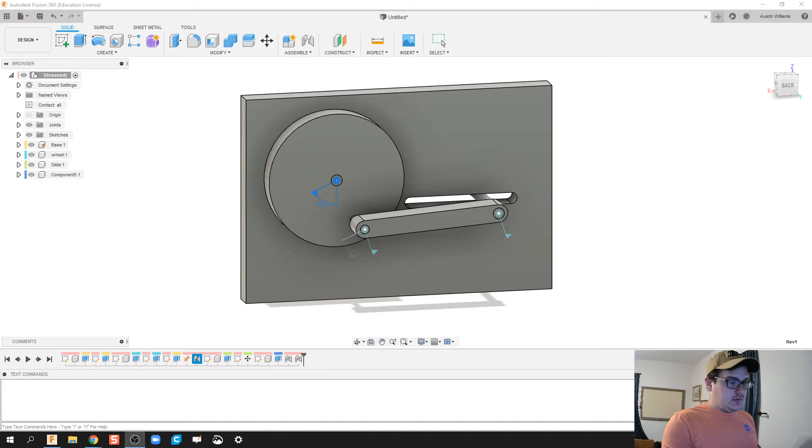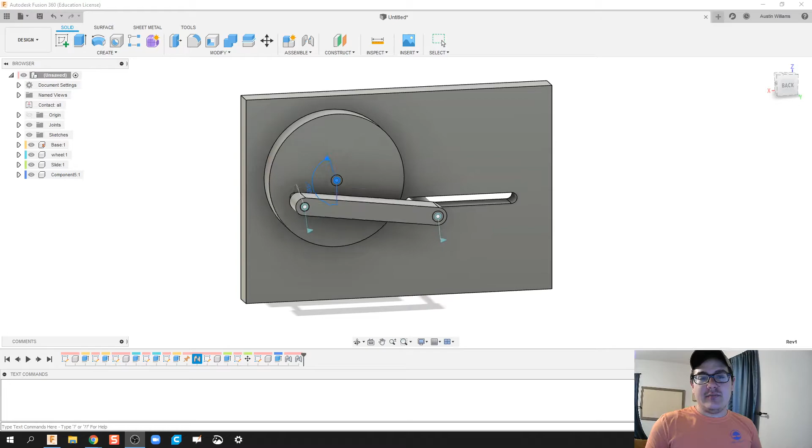Today what we're working on is taking this device, which takes rotational motion and converts it to linear, back and forth motion. This is something you'd see on a train, for example. You can think of how the wheels are propelled forward, usually by back and forth motion by a piston. So we're just going to create this and call it done for today.

First thing I'm going to do is click Escape and click on New Design. All right, let's get rolling. First thing I'm going to do is create a base.

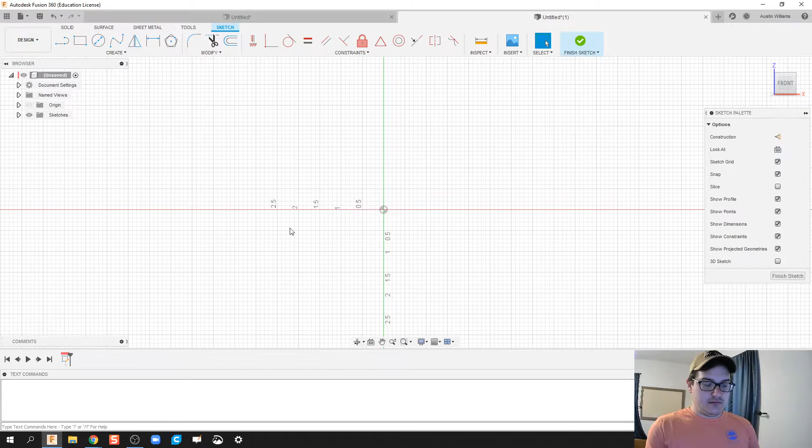So this is just a rectangle, a center point rectangle. Doesn't really matter how big it is because this is just for show, so I'm kind of eyeballing most of these dimensions to begin with. But I usually do a 5 by... I think I did a 5 by 6 in that last one. No, let's do 5 by 7. Not 67. Let's try that again.

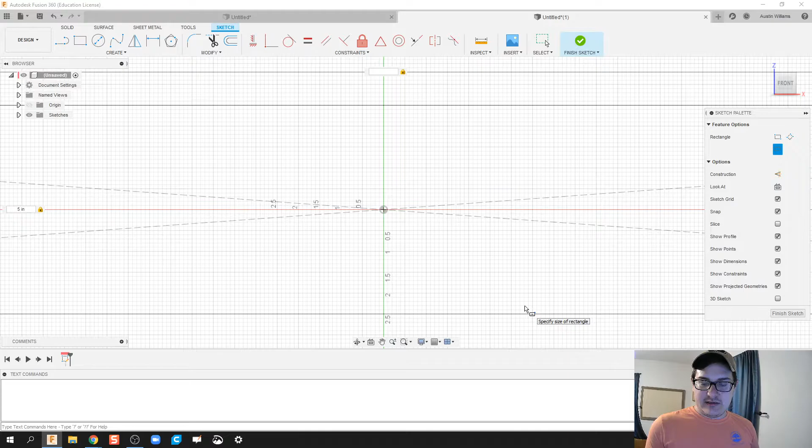Finish sketch. Let's go ahead and extrude this out just a 1/2 inch and make it a new component. We're going to call this component base, and everything we're going to do is based off of this. So the first thing I'm going to do is create my circle that's going to act as my wheel, and then go from there.

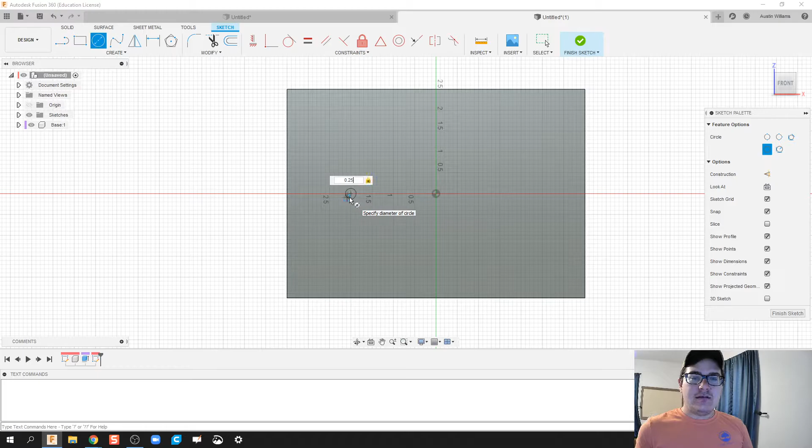Before I can do that, though, we need to have a peg sticking out that acts as the axle for the wheel to hold on to. So first thing I'm going to do is extrude something out about, let's do 1/2 inch in thickness. Let's make it a join because I want it to be part of my base. And then let's start a new sketch again.

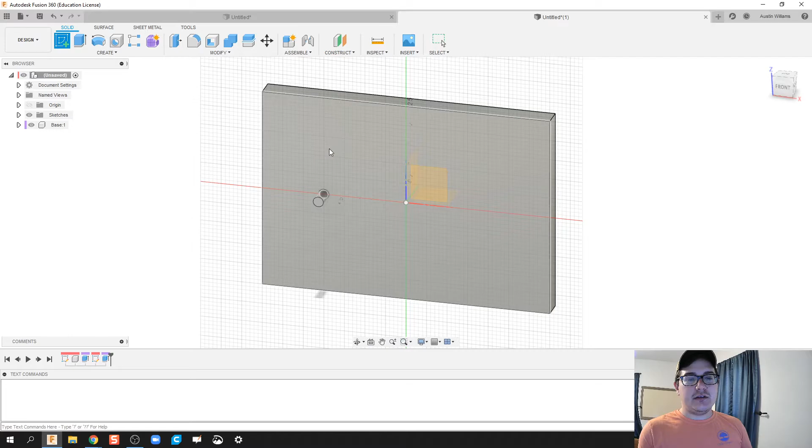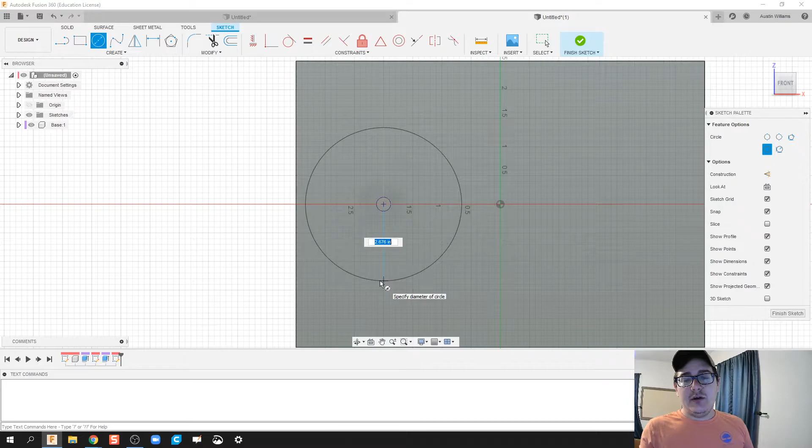This time, what I'm going to do is project this circle right here. And then I'm going to draw another circle for whatever wheel size you're looking for. You don't want to go too large because you run into problems downstream with that slot. What we do know is that the other half of this thing is about 2.5 inches in width, so the maximum movement that my slider is going to be moving is about 2.5 inches.

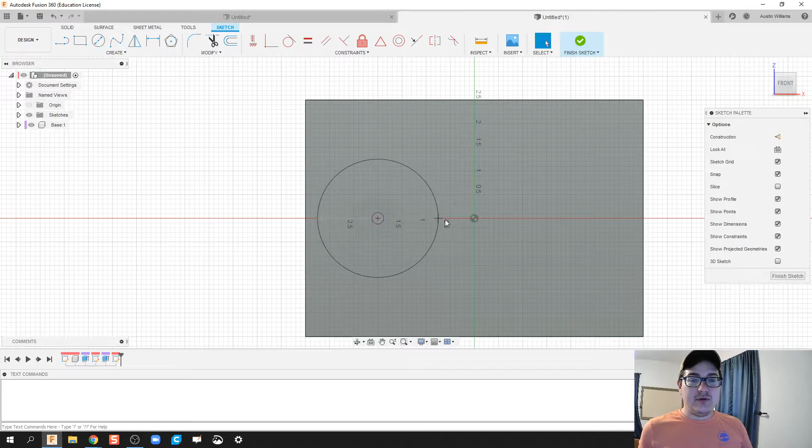So let's do 2.5 inch diameter. That way I know when my slider is rotating back and forth, or sliding back and forth as I'm rotating, I know I'm not going to extend past the bounds of what my slider can do. So if you make your wheel too big, your slider is going to hit the side walls of your base, and it's just not going to work out.

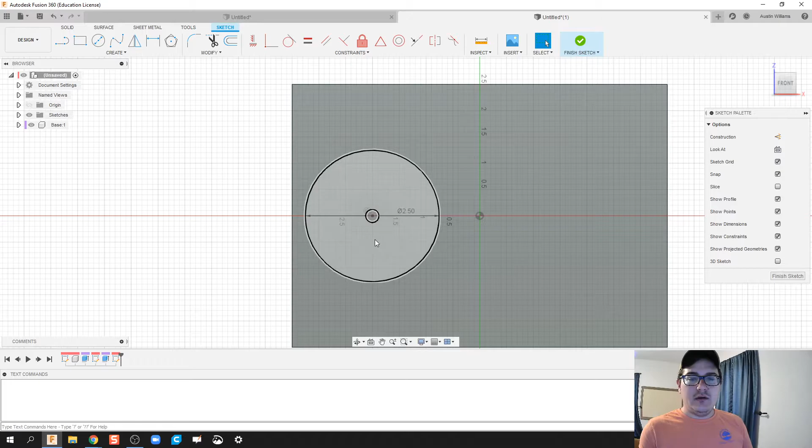Okay, so let's go ahead and take this wheel. Let's extrude it out, and let's make this a new component. Click OK, and we're going to call this just wheel.

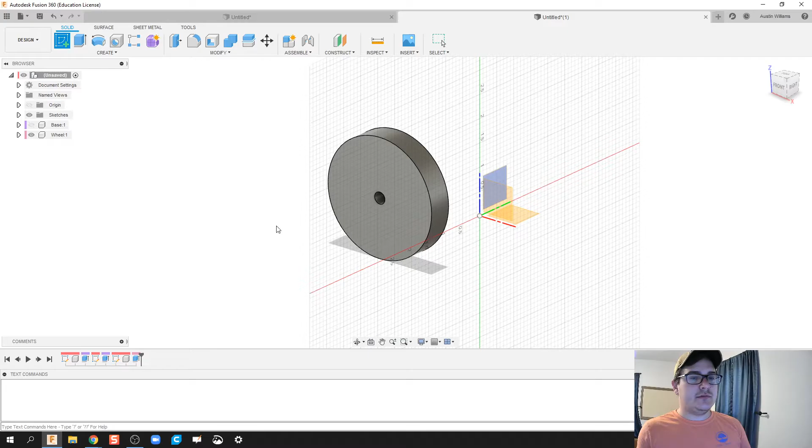All right, I'm not going to need my base right now, so just to get it out of the way, I'll make it inactive. Let's go ahead and throw a peg on my wheel for that link to match with. So we're going to bring this out, let's just do another 1/2 inch, make it a join, and that looks okay.

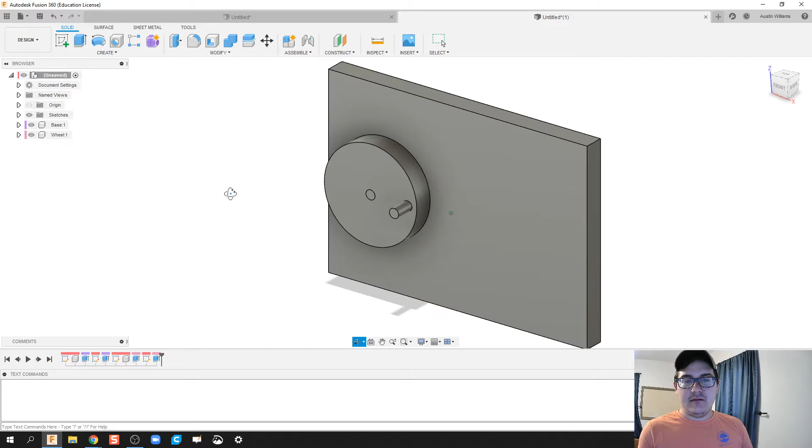We're almost done as far as making parts goes, but we need to make 2 more parts and we're done. Under create, what I'm going to do is click on create and then slot, and this allows me to create a nice slot for this to rotate back and forth on. I know that maximum length is going to be a little bit less than the diameter of my wheel, so 2.5 inches should be enough clearance.

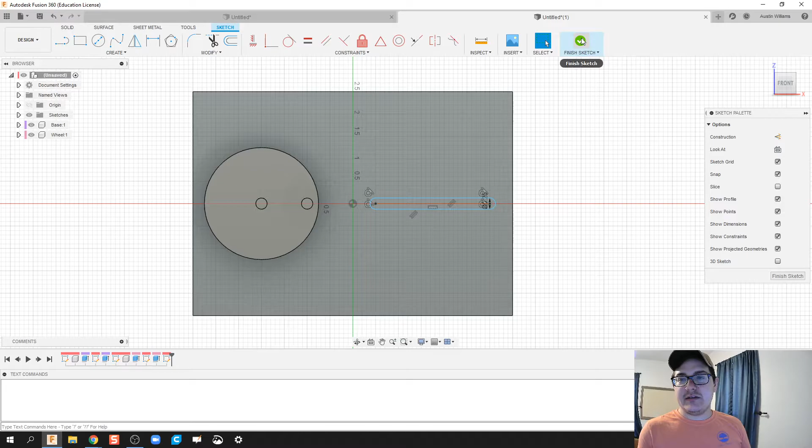And then we can make whatever size we want that slider to be. I just like a 1/4 inch for some reason, it seems to be something I repeatedly use. Okay, so what we're going to do is cut that slot out, click OK, and here we go.

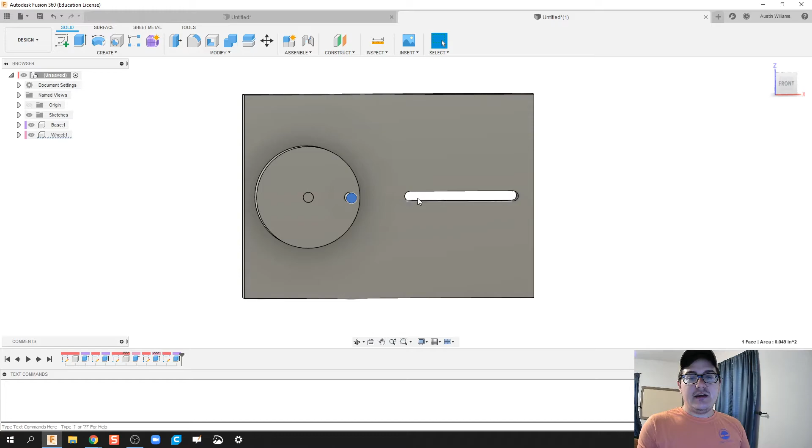Now in this neutral position, kind of the furthest to the right it's going to be, I want my peg to be. That way, when I create my slider and the distance of that link, I know we're already in a good spot. If it's not in the right spot, you might have to go and change the size of your link. So make sure that this wheel is faced to the far right or to the far left, that way you know it's going to fit in that slot appropriately.

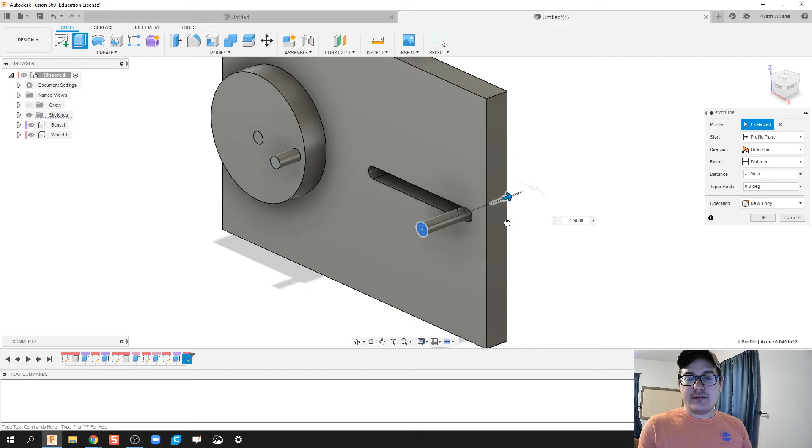But since we're the far right, what I'm going to do now is create a slot that is to the far right. Create a slider. Let's go ahead and just go back some distance. Create as a new component. We're going to call this our slide.

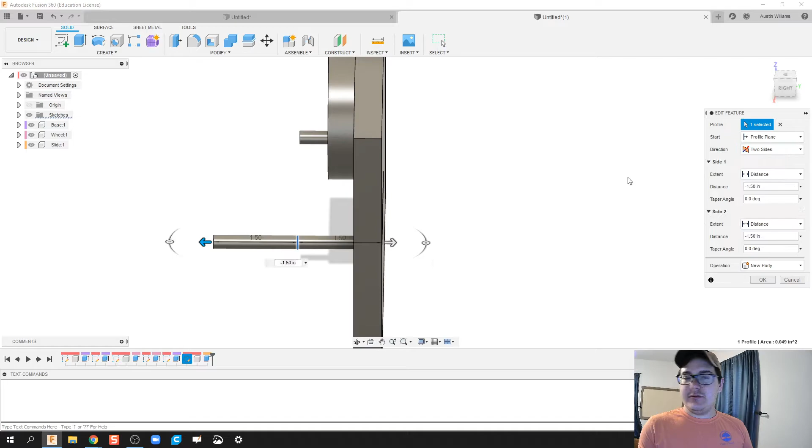And then the last thing I need to do, I might need to make that a hair bit longer. Let's do a symmetrical extrusion. Actually, let's do asymmetrical. Let's do two sides, that way one side is lined up with my peg up here, and the other side is lined up and sticking out on the other end. Click OK, and there we go.

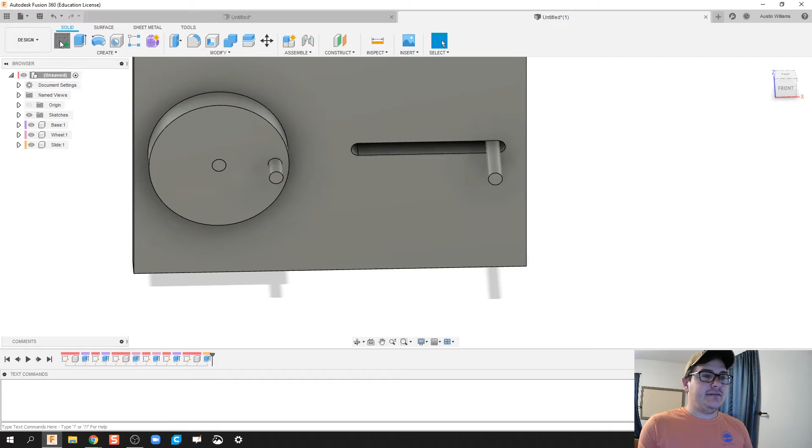That looks better. We're almost done, folks, can't believe it. So we're going to create a sketch on the face of this, and hit P on my keyboard for project. I want to match up with this circle right here and this circle right here to create my link. Everything else I'm going to make inactive, that way I'm not accidentally clicking on any other geometry.

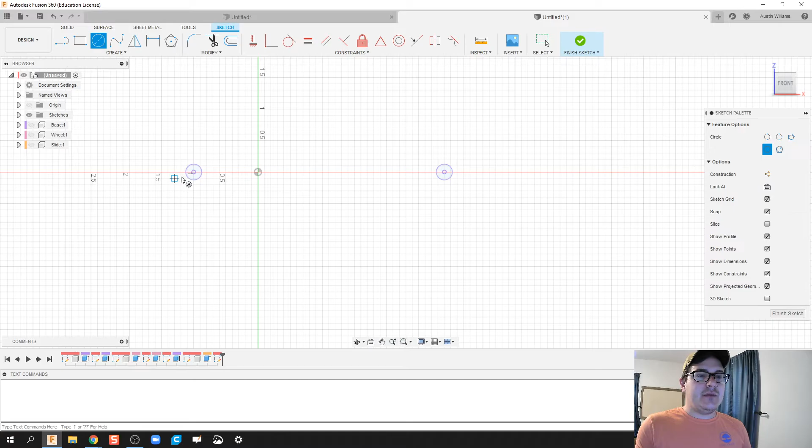And from here, all I'm going to do is make a slightly larger circle. So a half inch here, and a half inch here, and connect the two. Hit finish sketch. I'm going to extrude this.

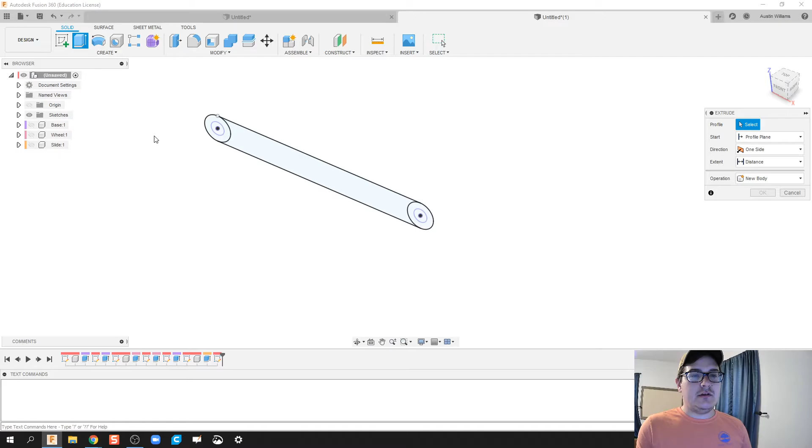I don't know how far to extrude it, so I'm going to make my other parts visible again. We're going to click on this profile, and make it so it's flush with our wheel. That looks okay. Click on new component, and we're looking good, folks.

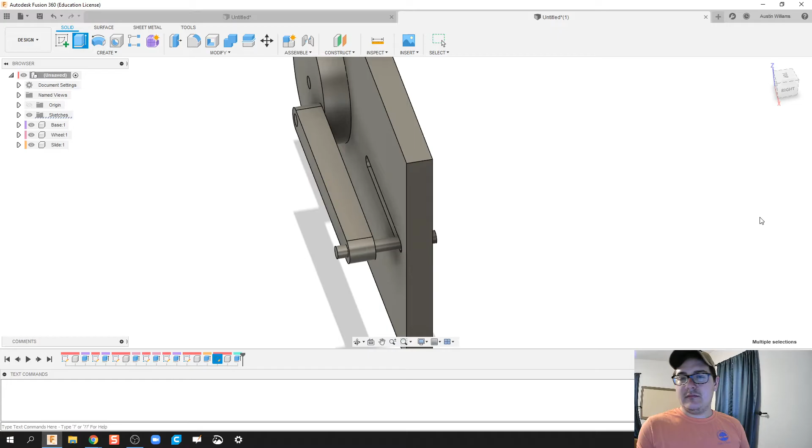We're almost done. All we need to do is throw in our constraints and our joints, and then we're done. Before I do any of that, always, always, when you're starting your assemblies, go ahead and take your base or whatever you're not going to be moving and ground it. When you start making these joints, you might run into problems if one piece isn't grounded to everything else. Just have one piece in there that's not going to move, and you should be good to go.

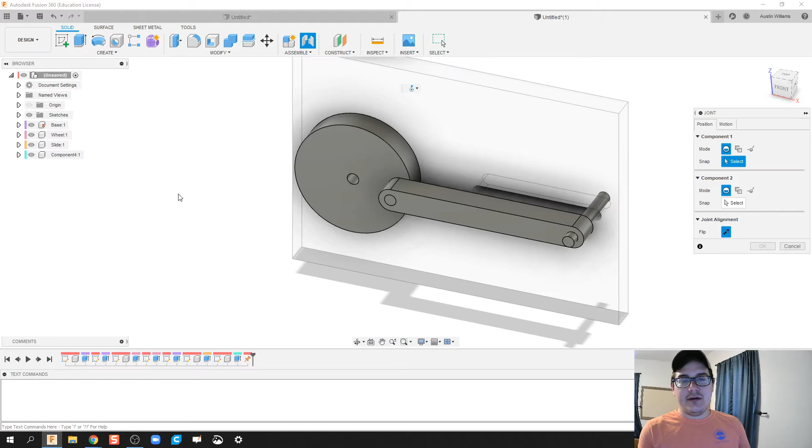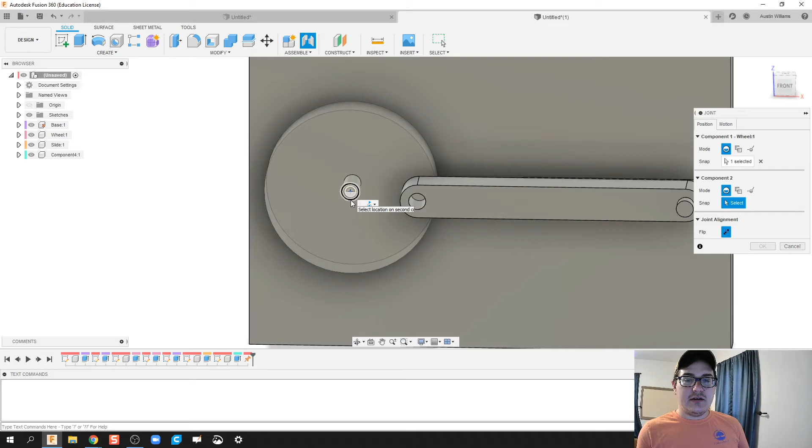Okay, now I'm going to show some neat tricks when choosing joints. So what I'm going to do is tell this wheel to spin around that pin. This is pretty easy because there's nothing else in my way. So I'm going to click on the outside edge of that wheel, click on the outside edge of that base, and we look good there.

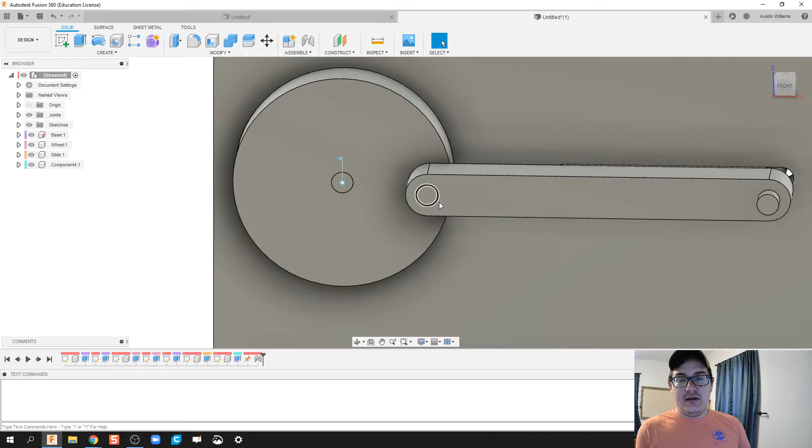There's nothing in my way, pretty easy. However, we get into a little bit of a problem here, and I'll show you why. If I just click on this outside edge and this outside edge, I may not be picking the things in the way I want them. I might have done it backwards. So what we're going to do then, when we're on this joint command, I can hover over which face I want to use. Then I know what I'm going to do is use this part as my first component.

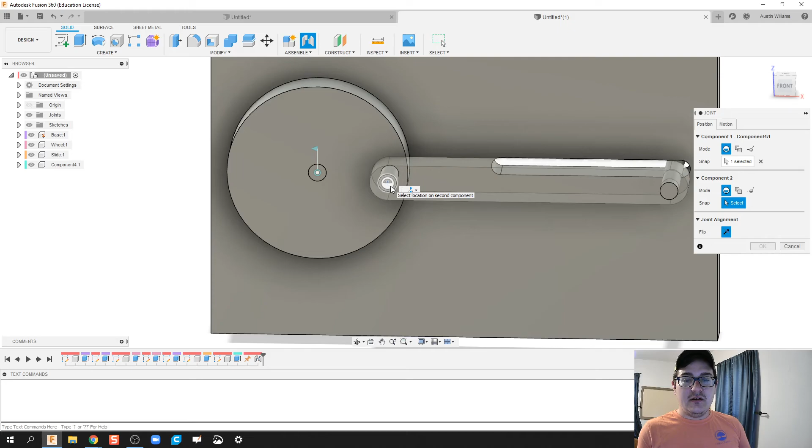So I'm going to hold down Control on the keyboard. By doing that, it keeps this face selected, but then allows me to choose what I'm going to be doing with this face. Am I going to be choosing this point or the center of the circle, so on and so forth. It's really easy, and you don't have to activate and deactivate other parts that are in your way. You can see the face but only manipulate it from there, and you should be good to go.

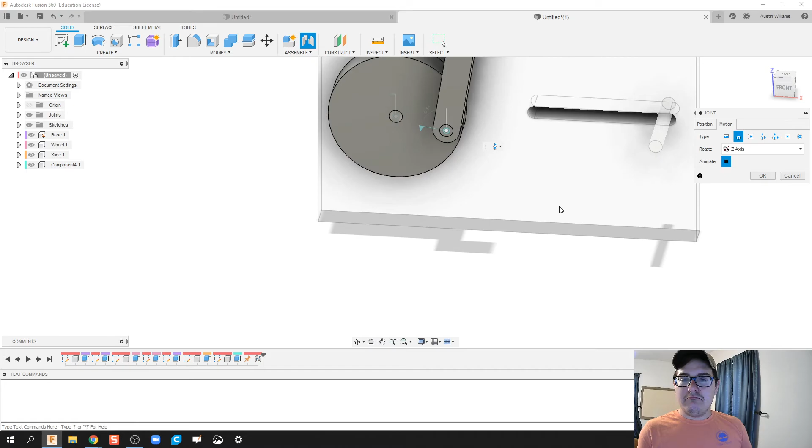Let's try that again. Okay, somehow I flipped the axis on accident. I think I hit something on the keyboard. Okay, all right, so that looks okay. Wonderful, click OK. Last one.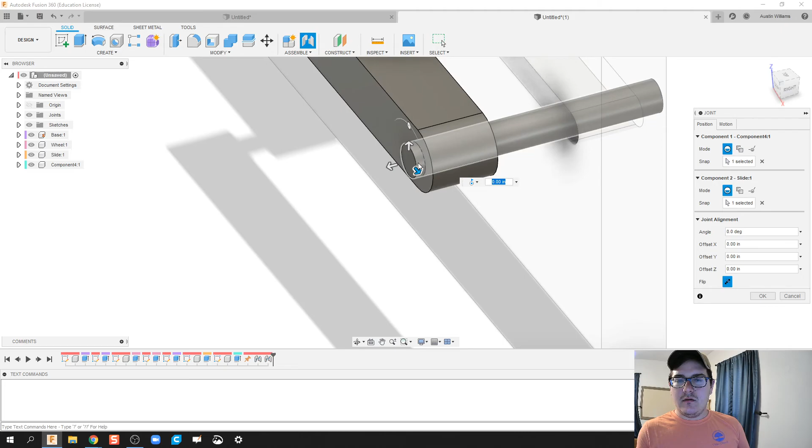We're going to join the edge of this to be rotating around the edge of that. It doesn't like that though. Let's check that again. We're going to have to move that down just a hair so we're not upsetting anything else. Click OK. All right, now there's another problem we're going to run into.

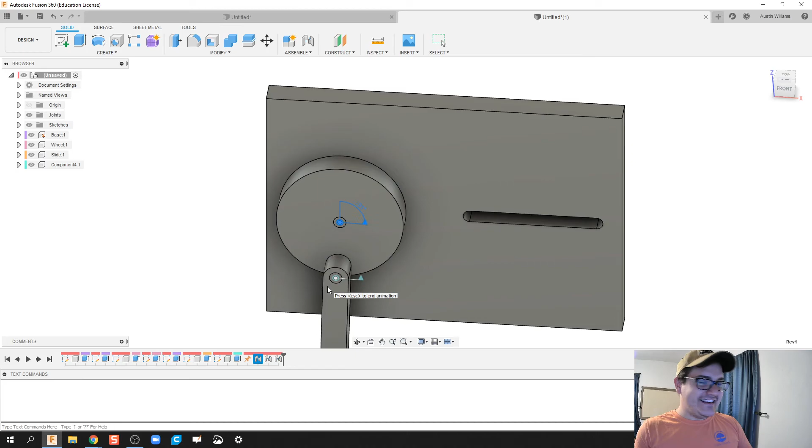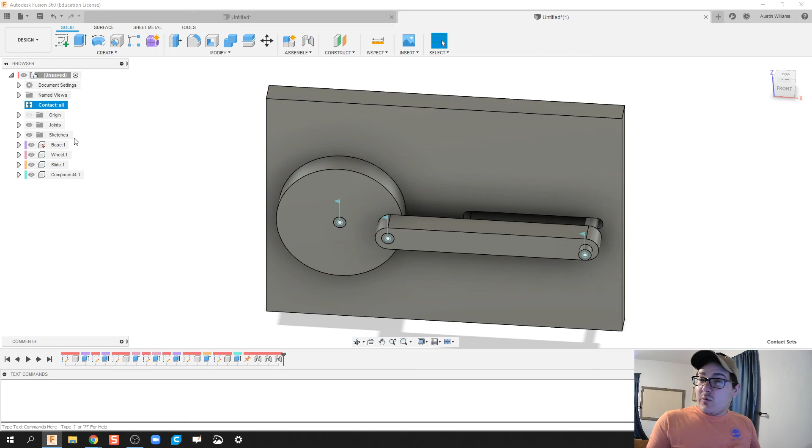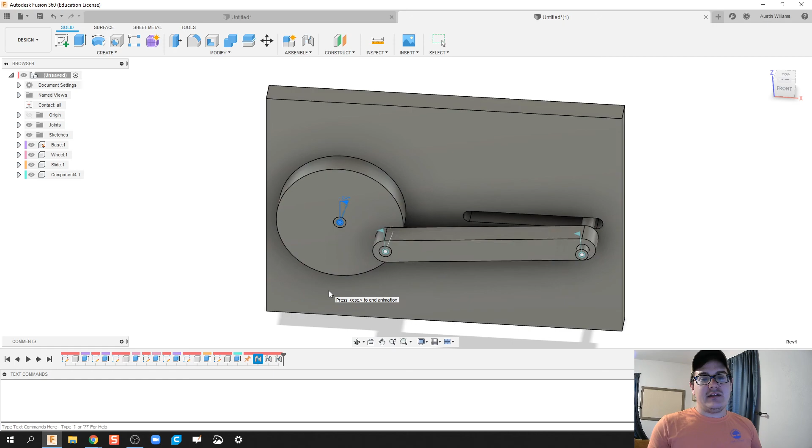I'm going to right click on this and animate model. It doesn't do really as expected, and that's because we haven't turned our contact sets on. So what I'm going to do is under Assemble, enable contact sets, and then right click enable all. That's just a nice shortcut way of saying none of these pieces can go through each other. If you're having problems with contact sets and things aren't made quite right, you can get away with it by selecting your sets. But I prefer if you did good part design, and then all contact sets work as they need to. There are some more complicated ones that really have a hard time, just the system talking to itself, like a screw insert into a thread.

But here's what we got so far. So we were able to build a device that converts rotational motion into linear motion, or vice versa, depending on what's doing the driving motion.